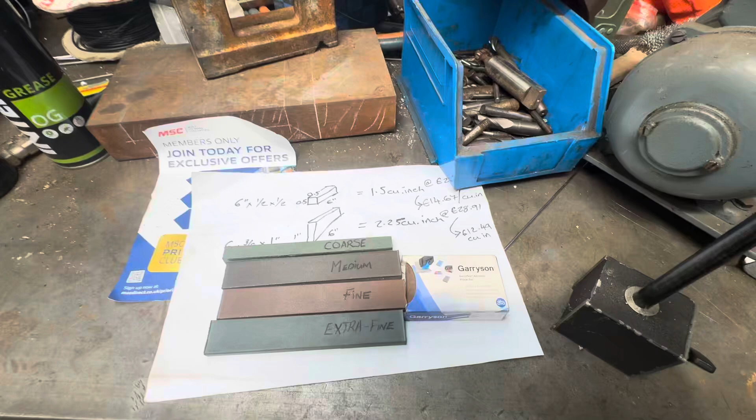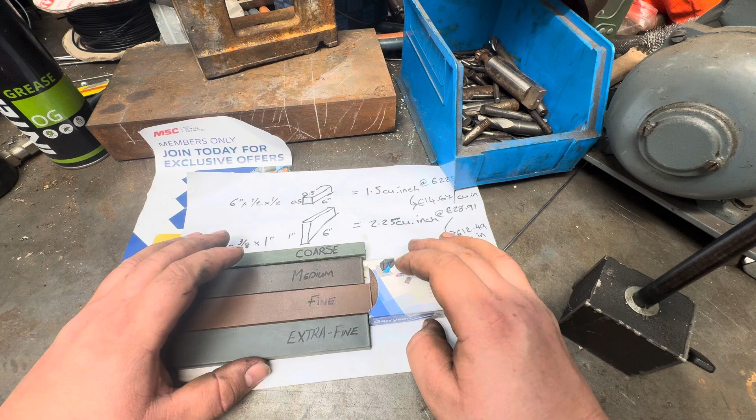So, just a quick look at these Cratex sticks I've ordered from MSC or J&L, and how they compare to this Garryson block, which is a lot cheaper, and I bought to see if it would work the same. So, everyone knows these Cratex sticks from Robin Renzetti, Stefan Gotteswinter, other people on YouTube. They're not particularly common in the UK. The only place I could find to buy them online was MSC.

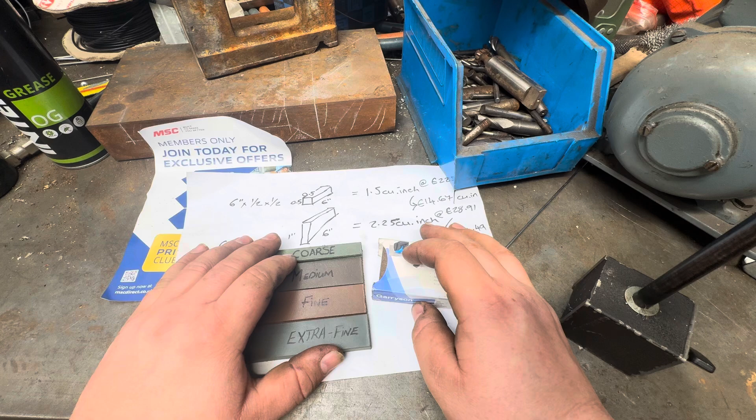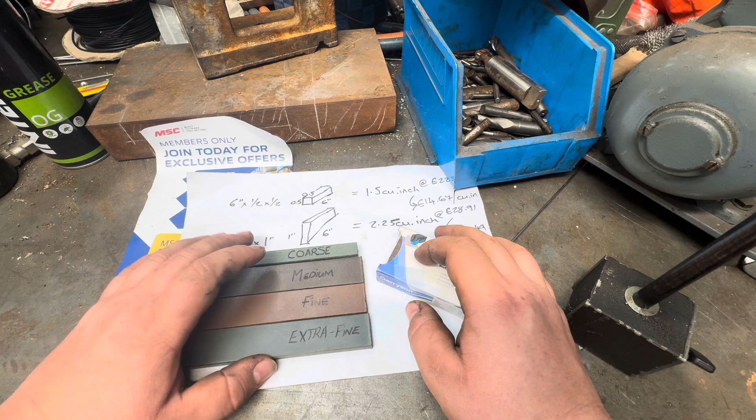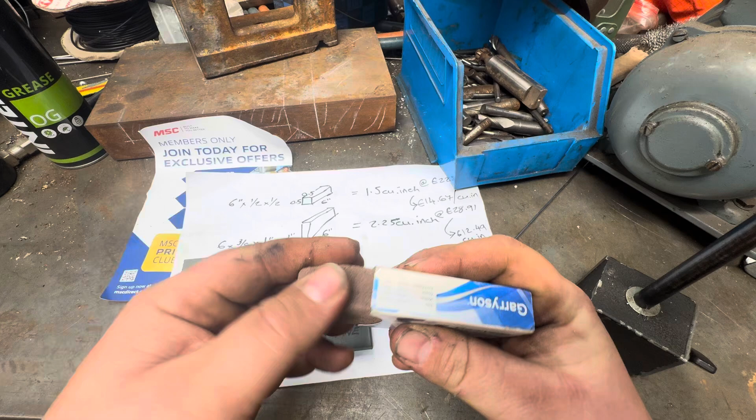When I looked at them, the price was kind of eye-watering for what they are, and they range from, in the square size, £22 to £28 plus VAT. So this is a ½ inch by ½ inch. They also do these oblong ones, but coarse wasn't available in the oblong at the time of ordering. So what I did was I went away and I ordered one of these Garryson blocks. So this is a Garryflex abrasive. It's a rubber block with an abrasive grit in it.

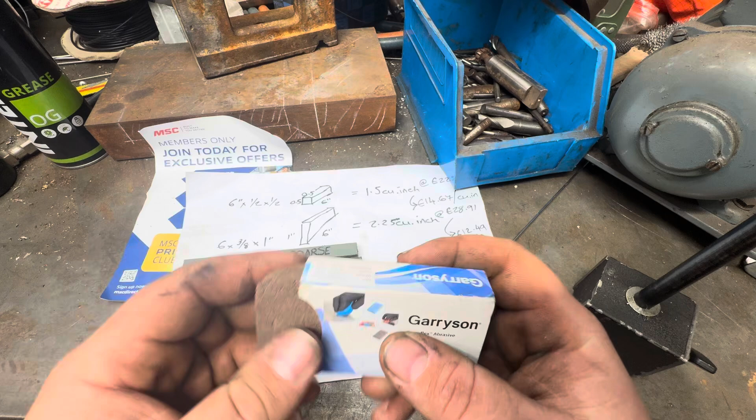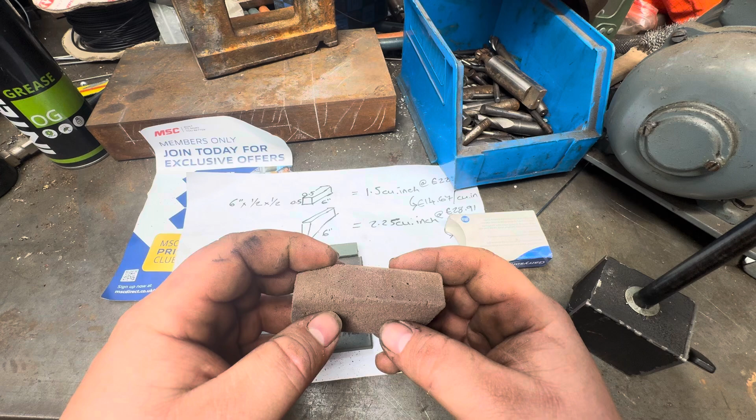And does it work? Kind of. It works for what it says on the package. Cleaning and polishing, removing the discoloration. It does excellent. Is it meant for on a lathe? Not really. The problem with these blocks is, and this is a fine as well, so same colour system, it's just too soft and pliable, and you can see even by hand, I can break away the rubber abrasive, which is great for exposing fresh abrasive. Not so good when you've got a rotating part rubbing against it, because it just breaks down so quickly.

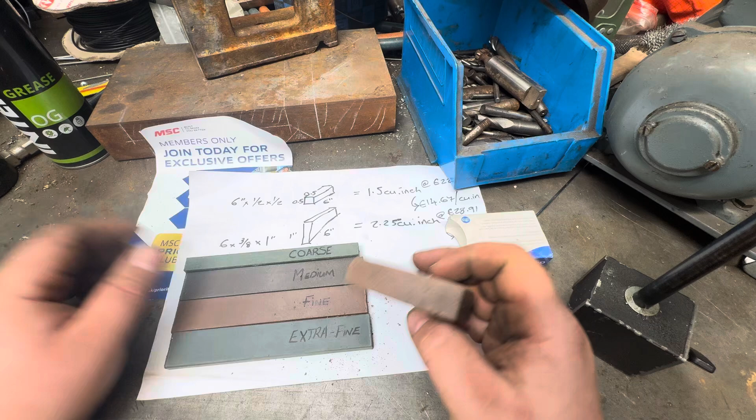So what I wanted this for was grooves and deburring edges, deburring centres in the ends of shafts that have got slight dings, etc. Kind of works. Doesn't work on grooves at all, really. It just breaks down. Touch it anywhere near an interrupted edge, it just breaks down. What they don't like at work is emery tape. They don't like us using it. Unfortunately, I do have to use it for some things. It's impossible to get away from.

What I have found these Garryflex blocks really good for is, and these are only £10 delivered, if you've got a bearing seat where the bearing's fretted or there's some dirt on it, corrosion, fretting corrosion is often like a browny colour, or you have some heat discoloration, etc. If you just touch this to the bearing seat and rub it backwards and forwards, it brightens it up beautifully. It gives it a polished finish again.

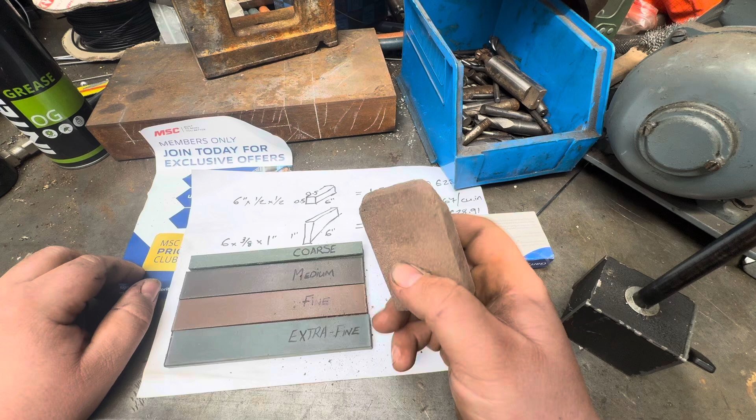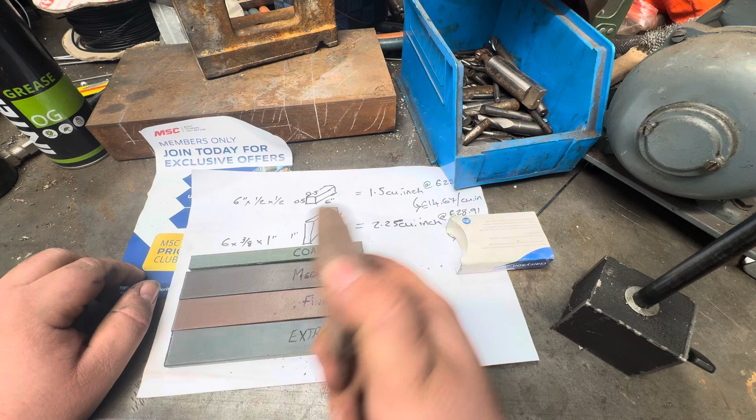Whereas if you hit it with Scotch-Brite or emery tape, it obviously dulls the finish and puts in almost a brushed finish. But this returns basically what looks like a ground finish to the bearing seat without removing a lot of material at all. We're talking a tenth every time you rub this backwards and forwards. It really takes off nothing. So for that, very good. For smooth surfaces you just want to brighten up and polish, it works very well.

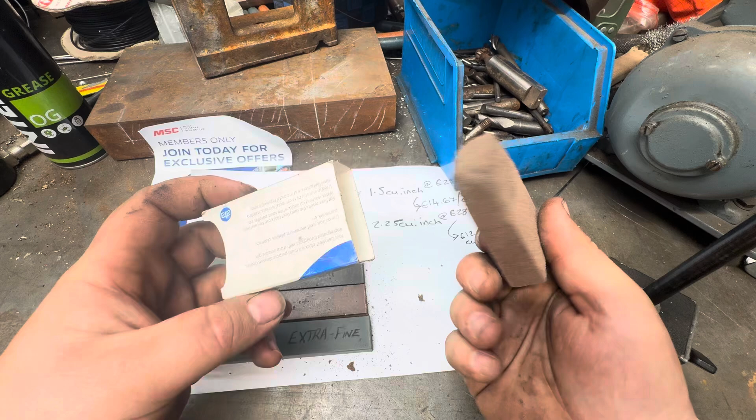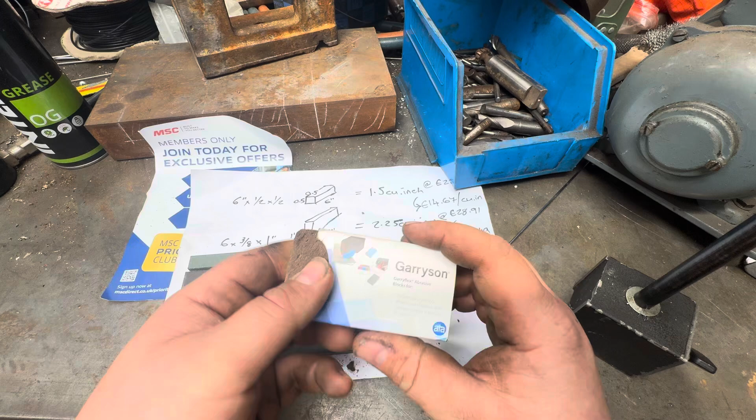But just to show you again, it's so pliable, this stuff, and all this brown dust is what I've managed to rub off of this block just with my fingers. So I don't know, they do a coarse and a medium and an extra coarse block. Maybe they'd be a bit stiffer. I might order a medium just to try. They are only £10. But for the lathe, not really any good. For polishing stuff, yeah, good stuff.

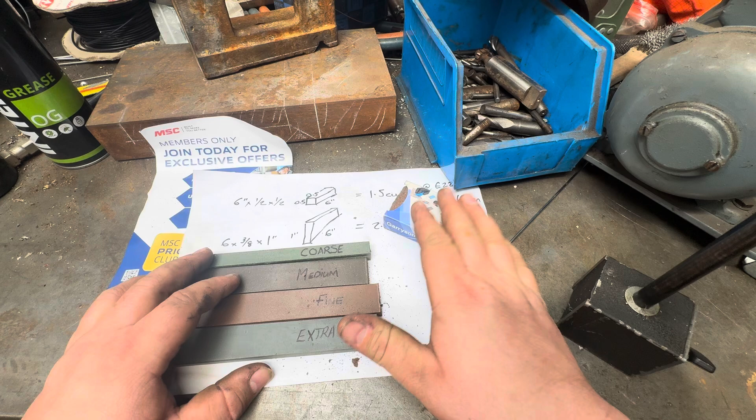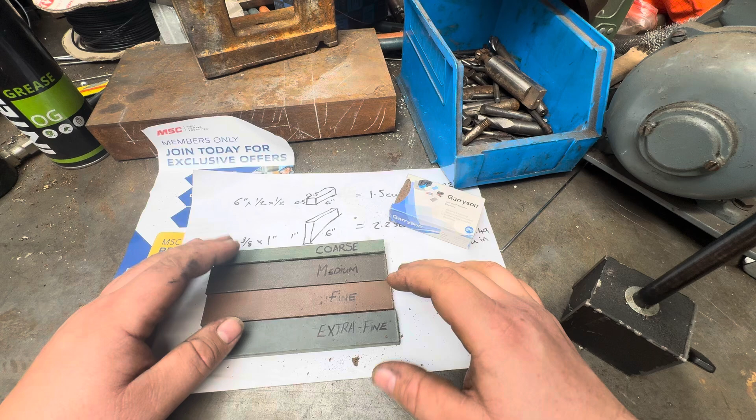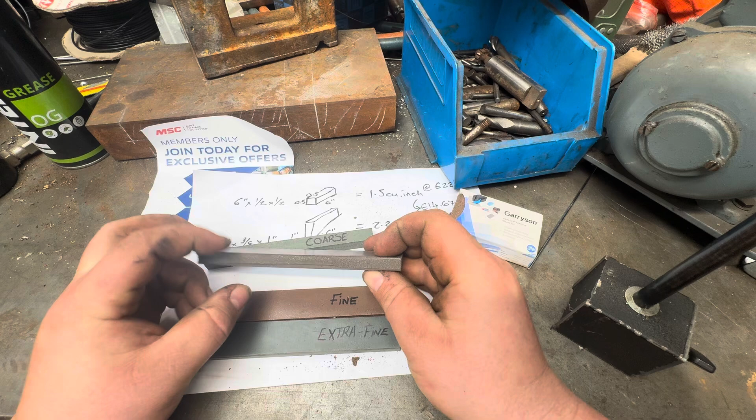So let's look at the Cratex sticks. I bought that first, decided it didn't really work, went back and ordered the Cratex sticks. These 4 sticks were just over £125 delivered with VAT, at 20% tax. So not cheap at all. 30 odd quid a stick, isn't it? I've done the calculations, because it comes in this ½ inch by ½ inch by 6 inch, or this 1 inch by 6 inch by 3/8 thick. You do get slightly more bang for your buck buying the oblong sticks, but the coarse wasn't available as an oblong.

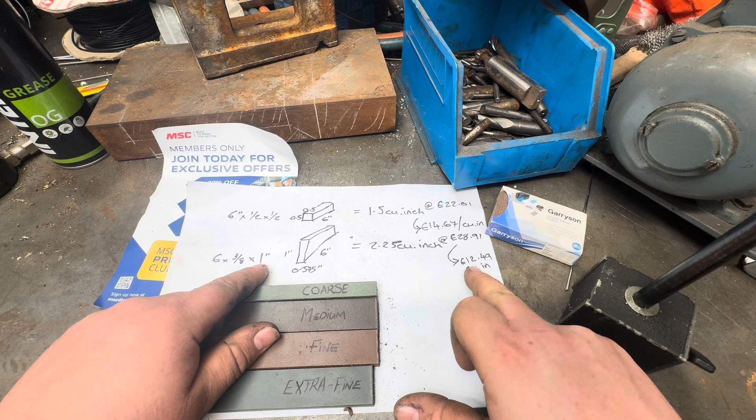So 6 inch by ½ inch by ½ inch, that's 1.5 cubic inches of abrasive material. The 6 inch by 3/8 by 1 inch is 2.25. So in monetary terms, the oblong stick is a bit dearer, but it comes out at 12.49 a cubic inch, whereas the square sticks come out at 14.67 a cubic inch. If you're using a lot of this stuff, that could be worth considering. I have not had a chance to try it yet, but just to show you how different it is in flexibility to that Garryflex block.

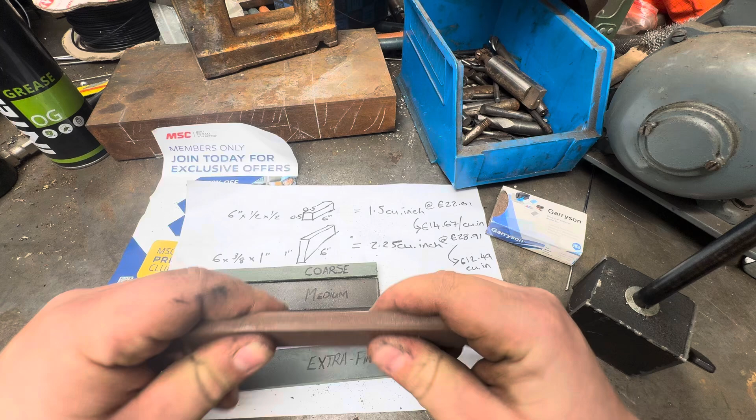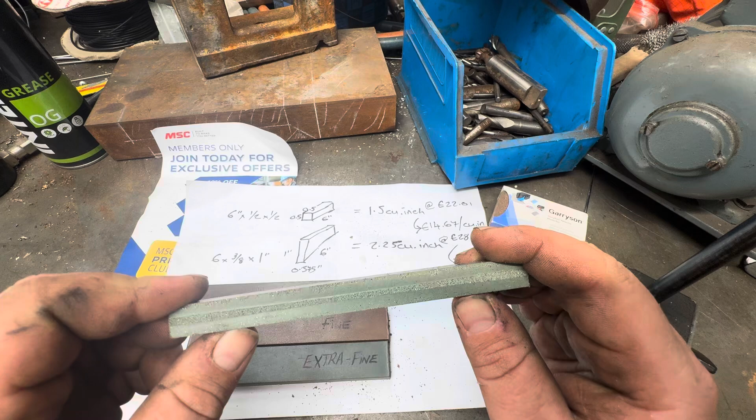Obviously, it's a hell of a lot stiffer. You cannot rub the abrasive off with your finger. And also, you can see the abrasive is nice and finely distributed throughout the block. I'm assuming the grain size changes rather than the quantity of grains. That looks a very small grain in the fine, and the extra fine is even smaller again. I'll show you the coarse. The coarse, you can see it's quite large grains of abrasive. And again, even that ½ inch stick hasn't got as much flex as that Garryflex block.

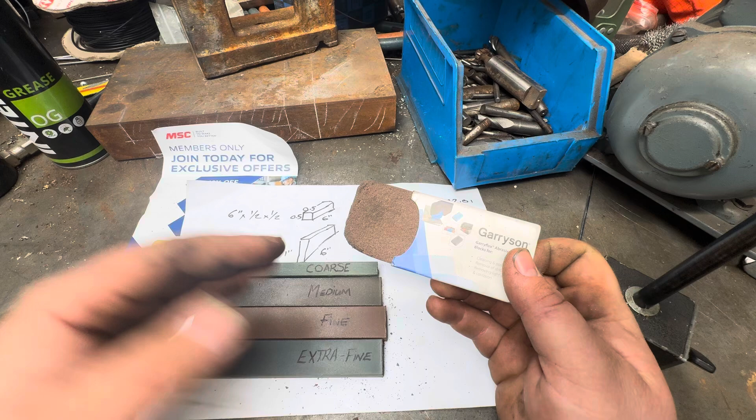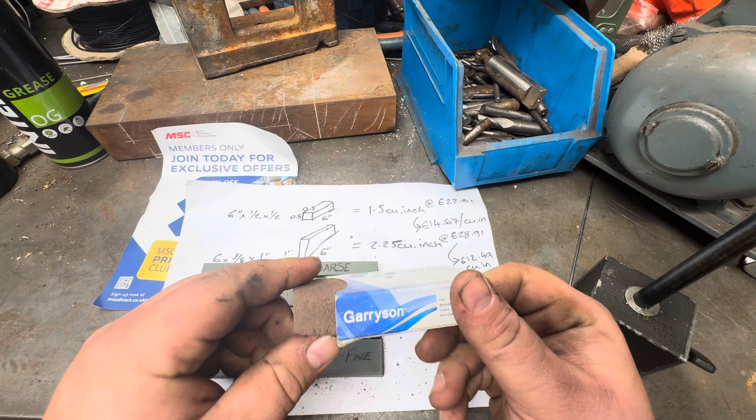So we'll give these a go on Friday when I'm back at my subbing job, and I'll tell you how they go, because I've got a couple of shafts I've got to do grooves on, which is what I want them for, just deburring the very edge of a circlip groove, and also for just touching into a centre that's got some very slight dings, just to try and get it to run a bit truer without having to set the fixed steady up.

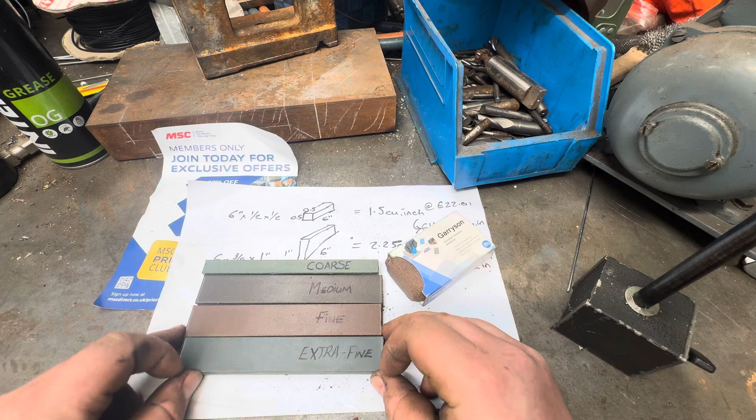So yeah, that's just a look. £22, £28. You're probably better off with the £28 one. And I should think for most people, fine or extra fine on the lathe would probably be enough. I just wanted to try the coarse and the medium. I can't imagine I'm going to get through them very quickly, and also when I do, work will probably replace them. So I've bought these out of my own pocket, but as long as work replace them, I don't mind. So yeah, that's that.